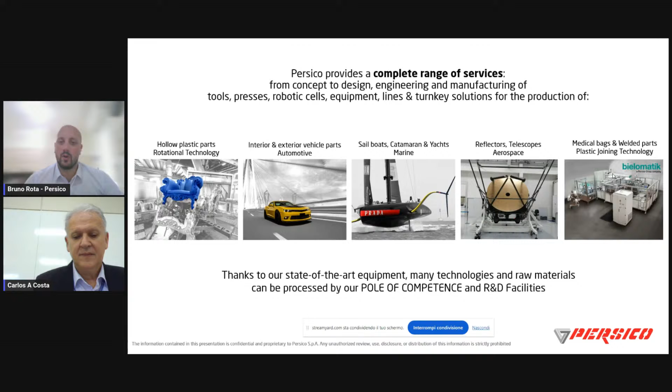So, like plastic bags for blood and so on. We have sites all over the world.

The headquarters and main site is in Italy, in Nembro, where I worked, but we have sites in North America, Mexico, China, and other parts, mainly for automotive and marine.

Last year we bought a tool maker in the USA because it's a very great market for us, and we want to increase our presence there. We want to have people there, but of course now we are training, and we want this site to reach our standard in quality, in type of work, and so on. So now we also have this rotomolding site in the USA.

So now let's focus more on the rotomolding world, what we do at Persico. Rotomolding is a really nice technology that can provide a lot of solutions for a wide range of applications.

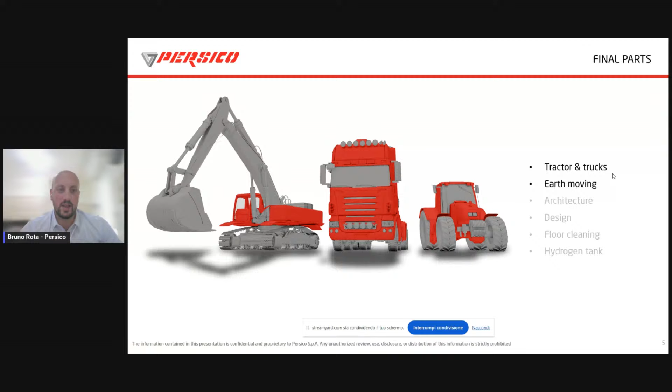Talking about the final parts you can obtain with rotomolding, you can really span very large fields of application, starting from tractors and trucks and earth moving machines, where we can make tanks, roofs, interiors, all with rotomolding, mud guards, and so on. So a lot of parts for this type of vehicle can be achieved with rotomolding technology.

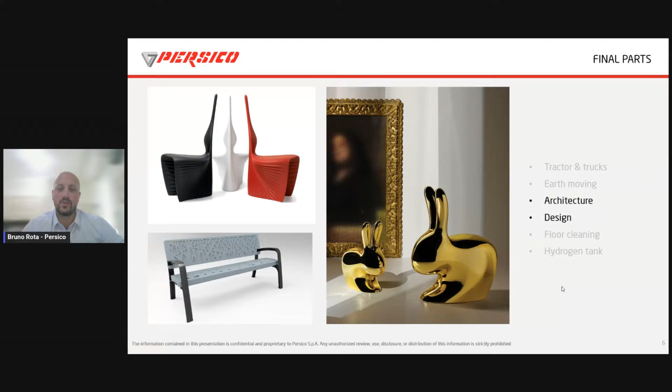We also work a lot with designers and architects to provide the best solutions for final parts. Here are some examples. This type of market is very huge, and every day there are new design parts that can be studied together. Designers come to Persico, and we study the solution together from the very beginning to the end of the project to obtain this kind of product.

And then again, with rotomolding, you can achieve very hard technical parts, like floor cleaning machines, which are very complex to obtain, with a lot of parts and a lot of cores. Not easy to obtain with other technology, but with rotomolding too, you need a lot of knowledge to achieve this kind of part.

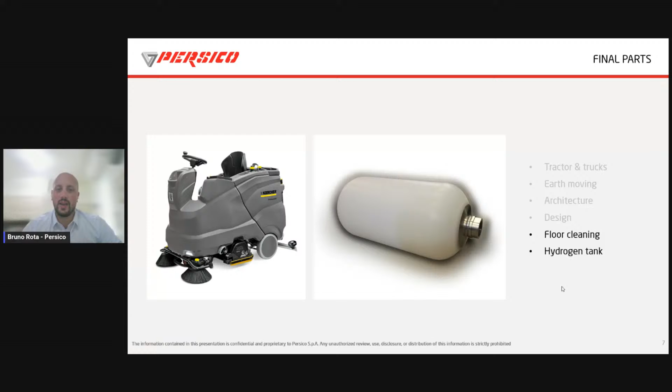But also hydrogen tanks, which seem easy but require great care and precision to obtain, because they have to resist very high pressure, so everything needs to be perfect to produce this kind of product. Again, with these types of products, we can assist the customer from the very beginning of development through to the final part.

Here's just a quick introduction on how rotomolding works. I think most of you already know it, but to briefly explain: you have a tool made of 2 or more parts. You put plastic powder inside, then put it in an oven and start to rotate. The plastic melts and covers all the surface of the tool.

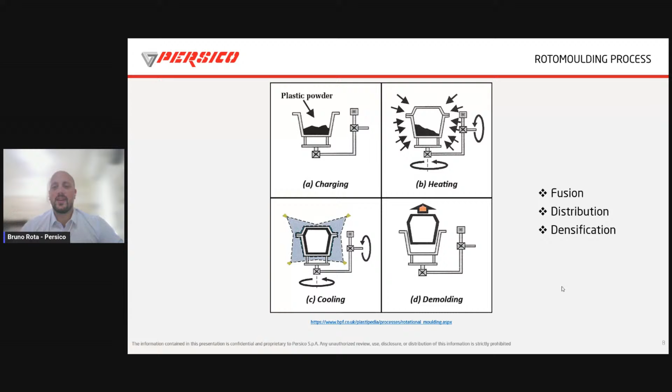When it's completely distributed on the internal surfaces of the tool, you extract it from the oven, start the cooling while still rotating on the 2 axes, and then when it's cold, you open the tool and demold the part. This way, you achieve a complete hollow plastic part without any welding, without any stress inside, making it a nice technology for this kind of product.

Here's a brief overview of what we at Persico do for the rotomolding market. As I said, we start from the very beginning. If a customer comes to us with an idea, we start with the design and co-design of a part to make it suitable for rotomolding. Then when we achieve a part that's okay for rotomolding and okay for the customer's purposes, we start with the design of the tool.

Of course, we share our ideas with the customer to make sure everything is okay, and we produce the tool. That could be a steel tool, cast aluminum, or aluminum CNC tool.

We can also make prototyping for customers. We have a pole of competence, an oven, and a smart machine, so we can try the tool in house before delivering it to the customer. We also make electric machines for rotomolding that can be combined with automation. Later we will see this better in detail.

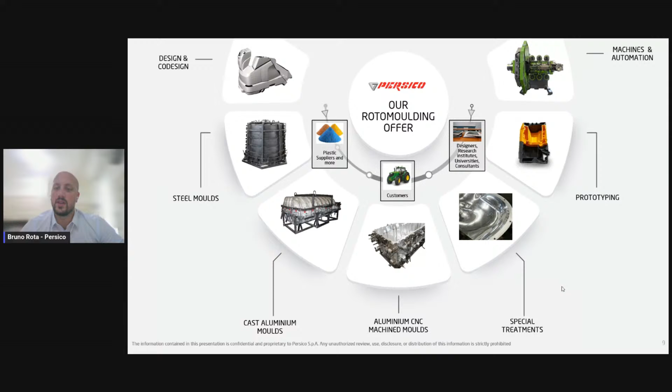And of course, we don't work only with rotomolders, but also with designers, final customers, and plastic suppliers for research and development. Here are some examples of tools we can provide, starting from steel tools that are suitable for a very big product without a lot of detail.

Because it's cheap, it's not the best quality in CNC, but for a certain type of product it's the right technology. Increasing the quality of the final part and the tool, we can work and provide cast tools: aluminium with a casting process. We create the shell of aluminium, and then we work to make it suitable for rotomolding. The most precise and higher quality tool is the CNC tool.

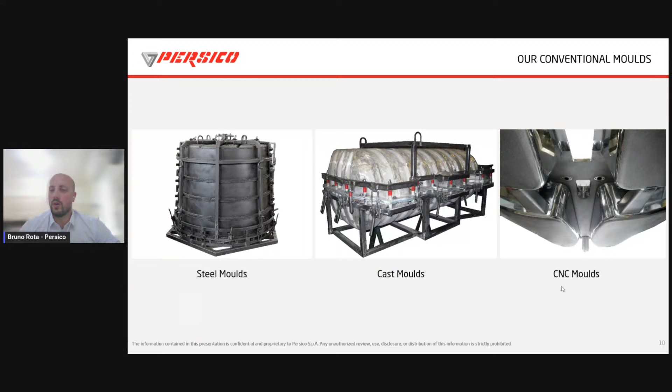Starting from billets of aluminium, we CNC the shape we want to obtain, and then we work with finishing, framing, and so on. On the surface of the tool, we can obtain very different types of effects, starting from the most common, so industrial smooth, shot peen, as CNC, but for certain types of products, design products or others, we can obtain different types of effects.

Here are some examples, like the wood effect, the mirror finish. We can work the surface with laser to obtain the texture that the customer wants, and we can collaborate together with the customer to study, and in the end obtain the result the customer has in mind.

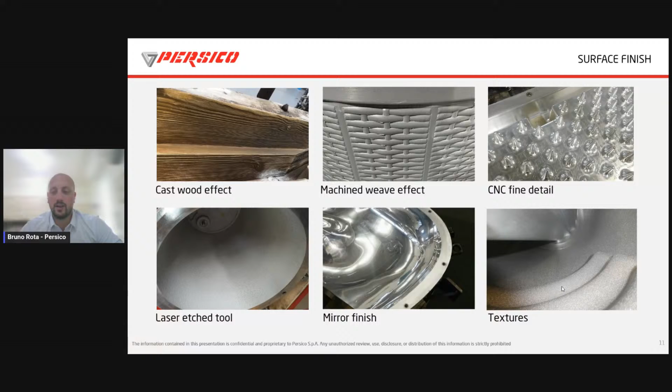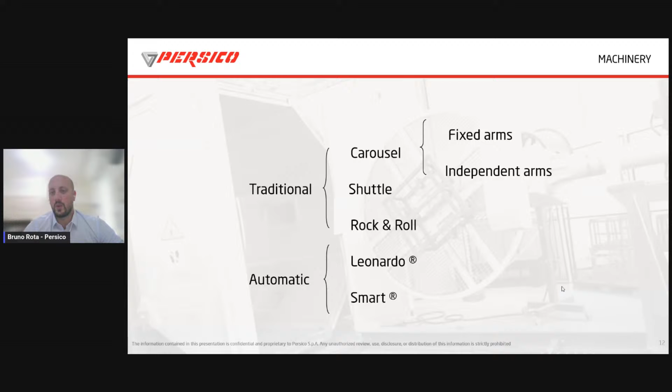As Persico, in this type of rotomolding, we provide only the molds. Then there is automatic rotomolding, where we can provide the Leonardo machine and the smart machine. In this case there is no standard oven as in the traditional one, but there is the Leonardo machine that works with hot oil, and the smart machine that works with electricity, and we can now see this better in detail.

We started at the beginning of the century with the first Leonardo machine, completely oil heated, because we wanted to introduce something new in the rotomolding world, something that could give the customer more solutions and benefits in terms of time and material. So we started studying the Leonardo machine with hot oil, and then developed our technology through the years.

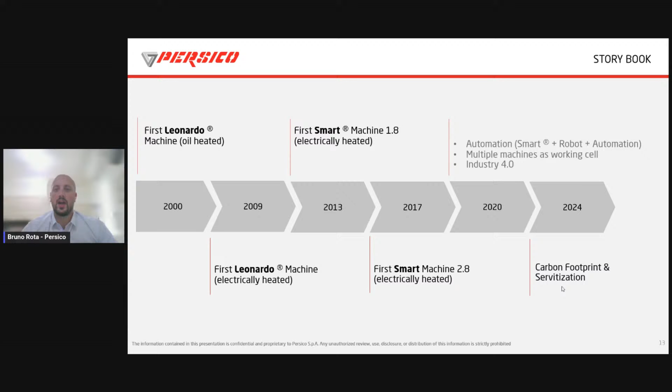Initially, again with the Leonardo machine, but heated electrically, and then we started also with the smart machine, completely electrically heated. With this kind of machine, since you don't have the oven and hot temperature, it's easier to introduce automation, partial or full automation of the process. So together with the smart machine, we can introduce robots and all the automatic systems that can make 100% of a work automated.

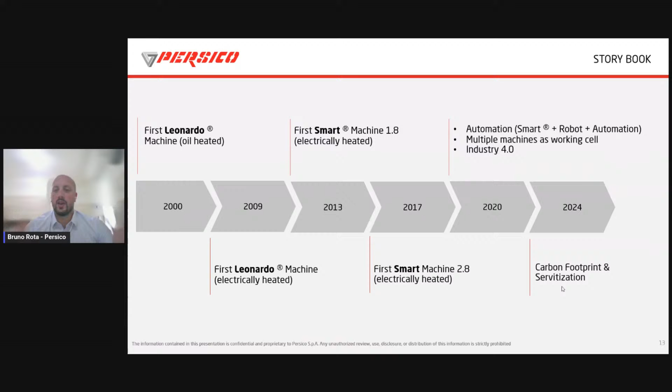Also the cooling is faster, because instead of only air or water, you can use cold oil again in these pipes, in direct contact with the tool, so you can speed up the cooling. By controlling the flow of the oil, you can better control the process, the heating and cooling of all the area of the tool. And again, in this case, you can implement automation on the machine, on the tool.

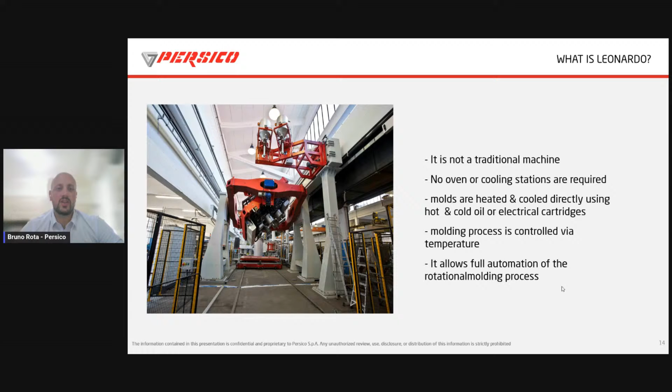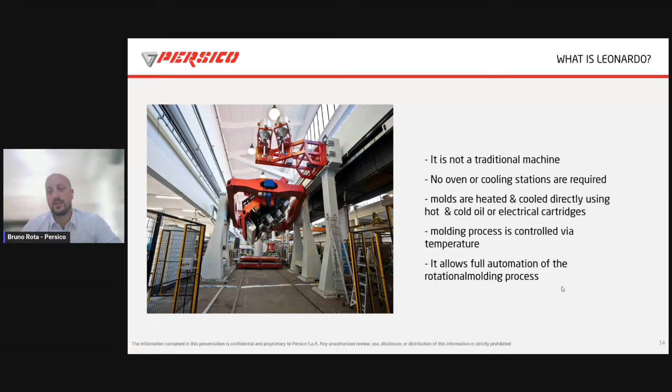In the photo, you also see the filling of the powder on top. So when the cycle is completed, the machine can open on itself, extract the part, fill the powder, close, and restart another cycle. So here you can see a video, done in collaboration with our customer, that shows their approach to rotomolding.

We worked a lot with them, and they started from the very beginning with traditional rotomolding. Then together with us we studied some solutions for them with the Leonardo machine, and then with the smart machine. So let's see this video that explains the technology better.

My name is Gunther Laube. I am production engineer here at Kärcher in Winnenden, responsible for the plastic production for the professional plants in Germany.

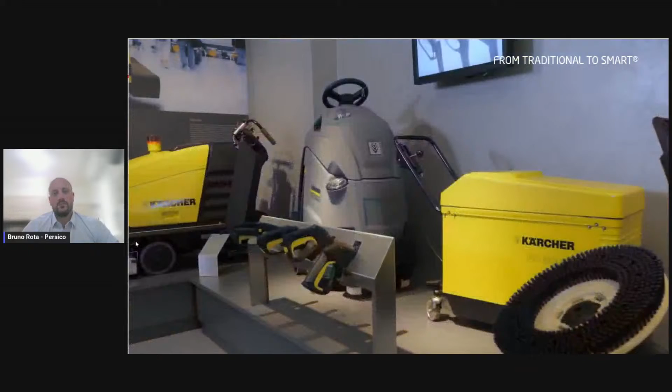We started rotomolding in 2004, and we bought a traditional machine with 4 independent arms and used cast molds for the first rotomolding parts.

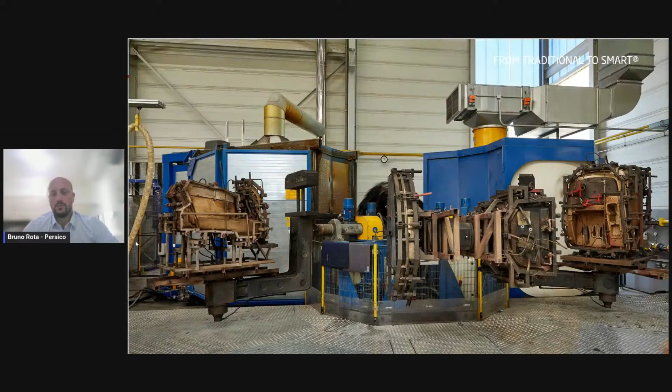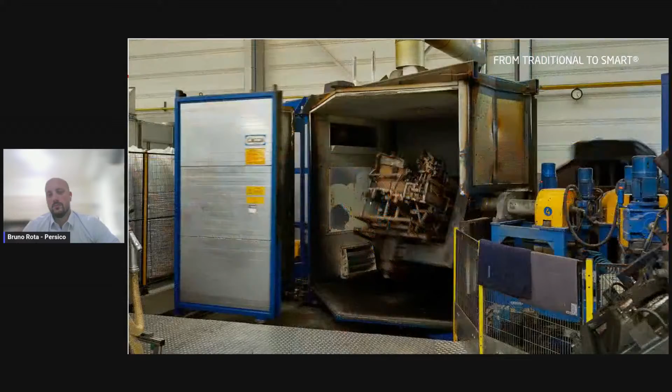Persico was and is one of the leading mold makers in Italy. We found good prices, good support, and also good quality, comparable with our customers here in Germany. We found the rotomolded parts out of the CNC milled mold were more precise in shape and followed the 3D shape of the part better. Also, the flanges were fitting better together, so we had less afterworking and a better quality of the products.

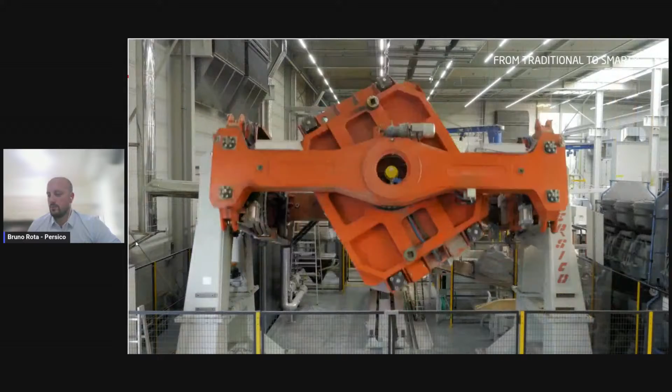We had a project with a tank of higher amounts, and so we found the Leonardo technology very interesting because of the automation of the whole process. We found production costs were lower because we need no person to operate the mold and demold the parts.

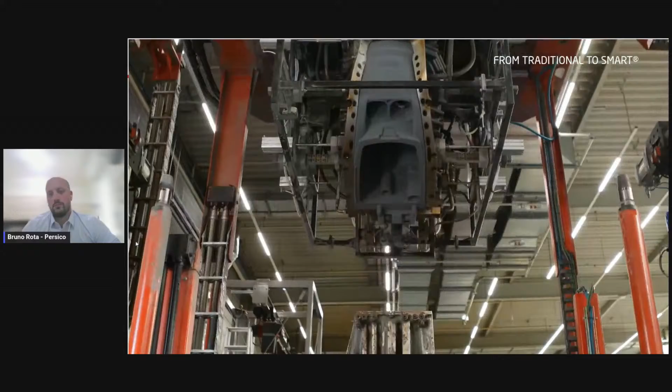We saved up to 25% of energy and of course also of material, because we were able to adjust the wall thickness better.

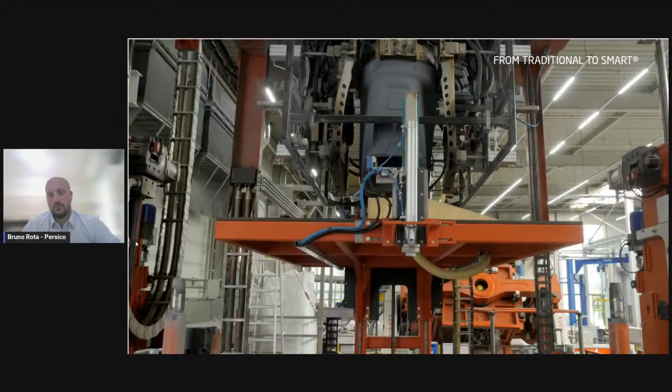Not all of our parts are possible to produce with the Leonardo technology. If they have inserts, we had to stop the automatic cycle, which is not good. Also, the dimension is sometimes a problem. With the smart machine, we can do these things.

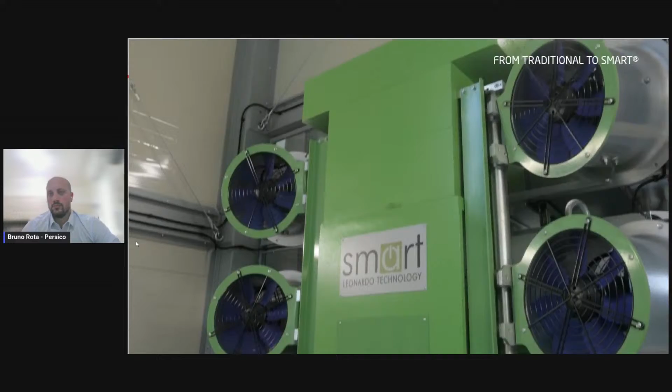In our opinion, the smart machine is the most energy efficient way to produce the parts. It is easy to adjust the wall thickness by choosing the power of the electric heaters, even in critical areas, so we get enough wall thickness there.

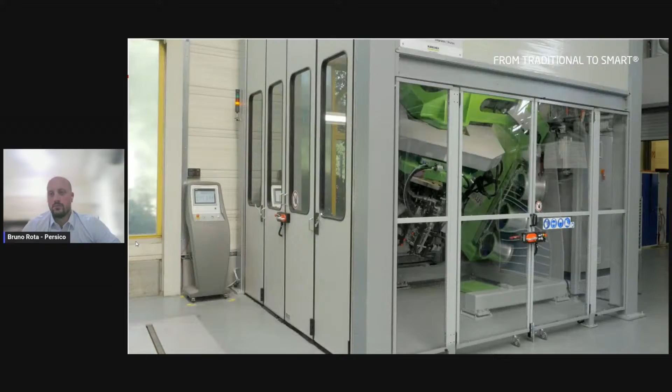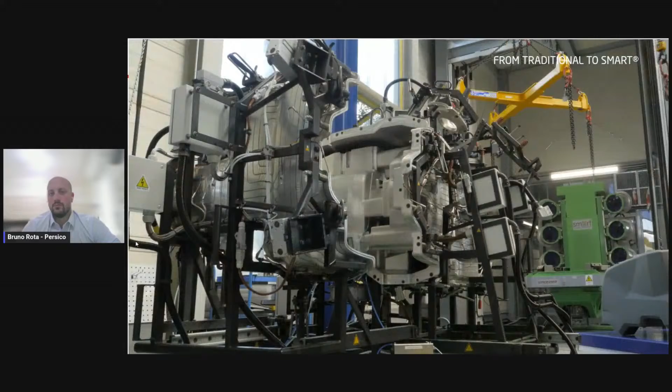It is easier to create parts with deep holes or long tubes, where you always have a problem with the traditional machines. With the smart machine, you only have to adjust the heating power and you have enough wall thickness. We are at the startup phase now, and we're only able to produce some parts.

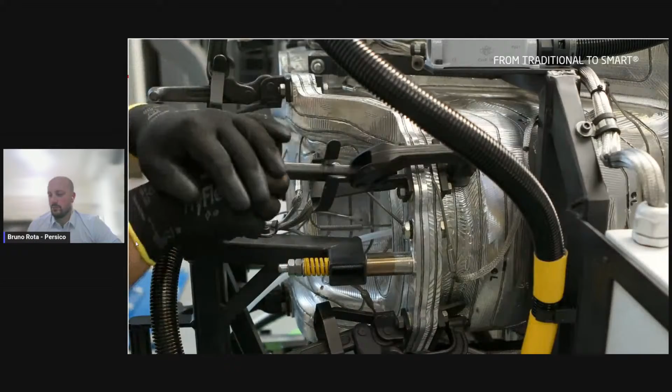Up to now, we have reduced 10% of weight at the part, which is good. And we found that the shape of the part is very good, very precise, because of the internal air we use at the cooling process.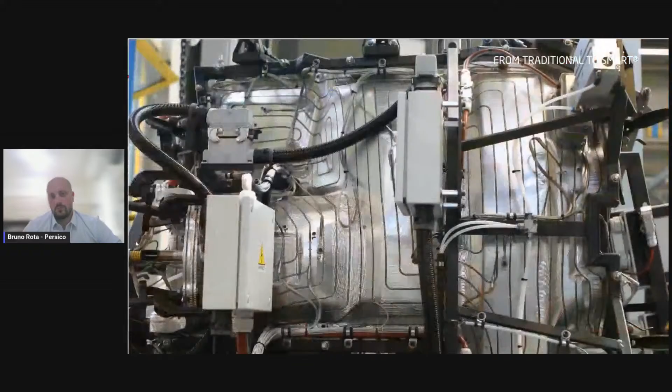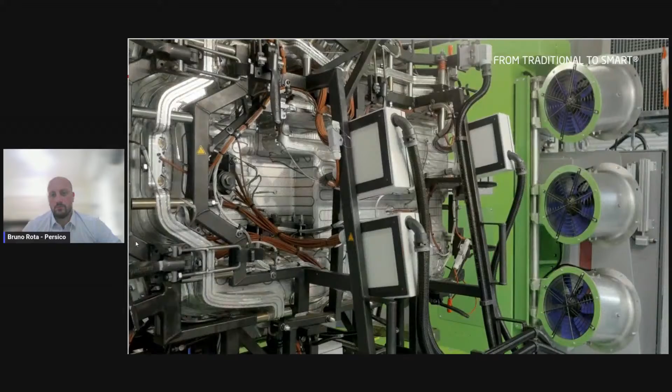Our molds have never been easy because we use very complex parts, so the mold needs to have many inserts and loose parts. So it was always important to discuss the project and find a good solution that was working at the end to have success.

With the Leonardo technology, we were able to produce our tanks with the highest amounts with less production costs. With the smart technology, it's easier to rotomold parts out of other materials than polyethylene. I think every time we put out of the rotomolding technology all that we can, we have new possibilities for the future.

As the video explained, our solution with Leonardo and Smart Machine is done in order to give some advantages to the customer: the possibility to make more complex geometry, the possibility to save time, energy, material, and the possibility to use different types of material.

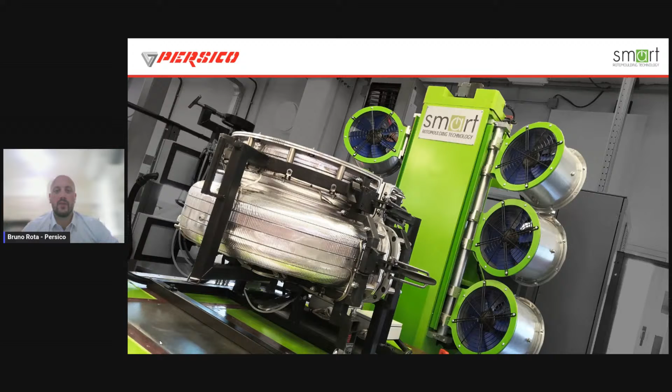In the video, our smart technology was already introduced, and this is a tool that works on the smart machine in order to provide heat to a tool. Again, we don't have an oven, but as you can see on the external surface of the tool here, there are a lot of electric heaters that are controlled by the machine in order to give the right amount of energy and heating to the tool.

Thanks to this technology, our customers can have a lot of advantages, saving some energy, because all the energy that is provided to the electric heaters is then converted into heat and transferred to the internal side of the tool. So there is no heat leakage like happens in an oven.

There is not the operation that is common in traditional rotomolding, when you open the oven and you waste a lot of heat - we may have a small tool in a big oven. Here all the energy is concentrated on the tool.

You can reduce the amount of material because you can manage the heating in different areas of the molds. In more critical areas, you can increase the thickness, and not in all the part. You can reduce the material in scrap areas, and so you can optimize the total weight of powder that you use for any cycle.

Because you can always use the same set of parameters, you will always obtain the same type of product. So there is process repeatability to obtain always the same product, controlling the heating and the cooling with all the probes that are inside the tool and connected to the machine.

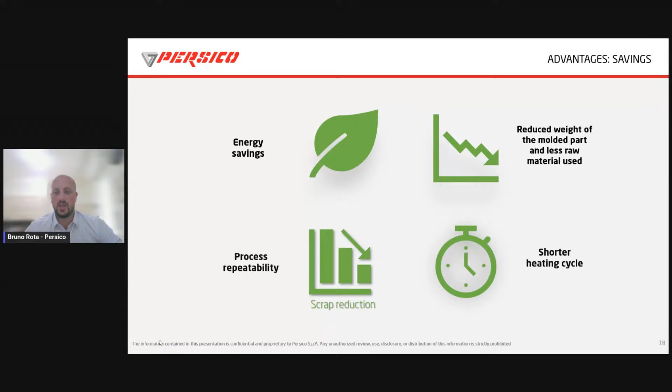You can achieve a shorter cycle. Of course, again, having electric heaters all around the mold, you can create a uniform thickness and manage the thickness in different areas.

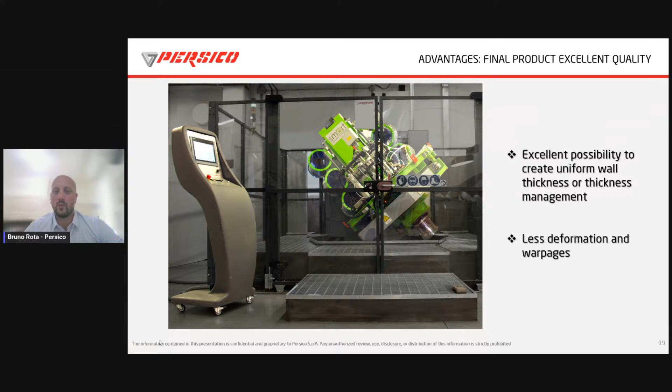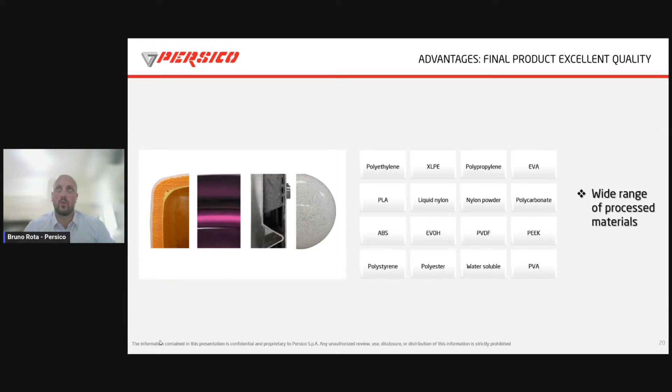So no problem of long cores, parts that are difficult to heat, as in standard rotomolding. And you can also manage the deformation and warpage, again controlling the temperature and the pressure inside the tool. Thanks to all the control that you can put on the process with Smart Machine, you can use more types of material easily with respect to standard rotomolding technology with an oven.

Here in this type of machine, we can control up to 48 different zones. So if you have a lot of critical parts where you need to increase the heat, with this kind of machine you can. On a tool you have a lot of different zones divided based on the heat that you want to give the product in all the areas, and you can control all of them with the power that you provide to the electrical heaters, and you can measure the temperature in each area in real time.

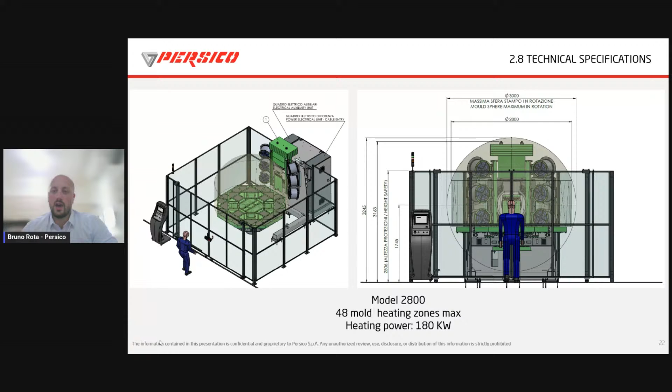As you can see, it's also an advantage in terms of dimension, because it's quite smaller if you think of a standard rotomolding oven. So it's very small.

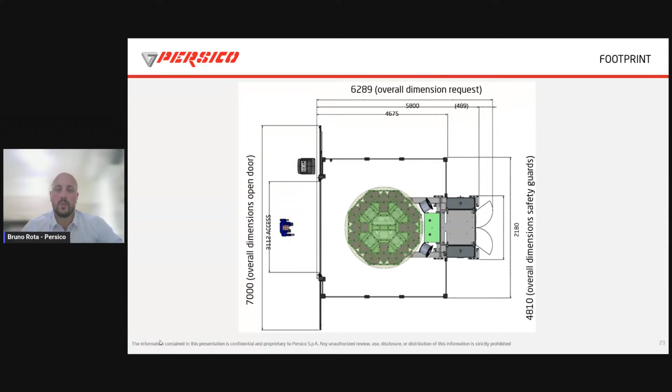Then here is a quick overview from the top of the machine with the operator.

With this kind of machine, what we want to give the customer is the possibility to innovate in the design of the parts in order to have more complex geometry. And of course, another very good point of this kind of machine is safety. We provide all the safety tools together with the machine so that the operator can work 100% in a safe environment.

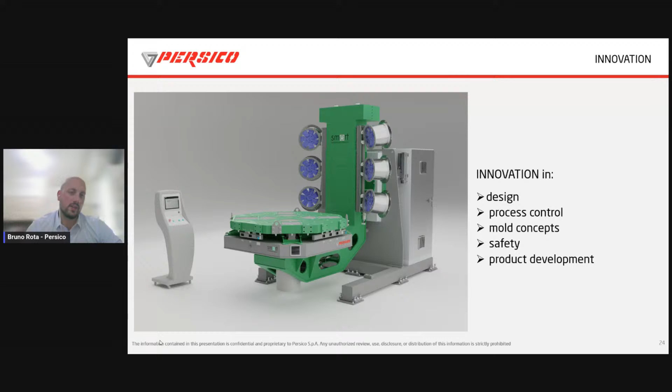Of course, you cannot only control the temperature, but there are also a lot of systems that can improve the quality of the part. You can generate vacuum inside the tool. There are gaskets on the flanges of the tool. You can put nitrogen inside the tool to extract oxygen and avoid oxidation of the part. You can pressurize the internal part of the tool, again to better control the deformation and warpage. And of course, you can pump air inside the tool for internal cooling as well.

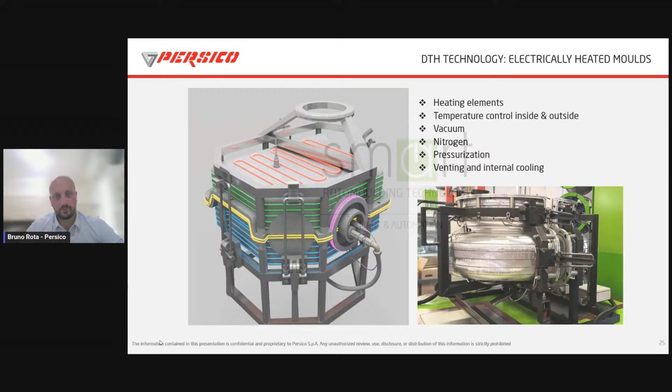As I said at the beginning, this type of technology is suitable also for introducing automation, because here you don't have to deal with hot temperatures outside of the tool. So we developed a lot of systems to help the customer automate the process.

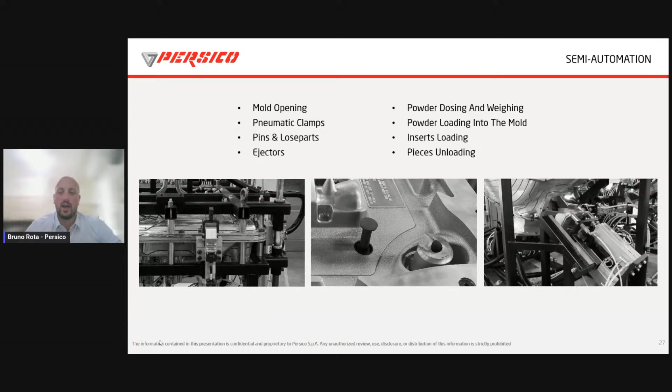But here it is still a semi-automation, because the work of one operator is still needed to take the parts out of the tool and so on. But of course, what we can also provide is 100% automation. So in combination with a robot, we can study together with the customer a fully automatic line.

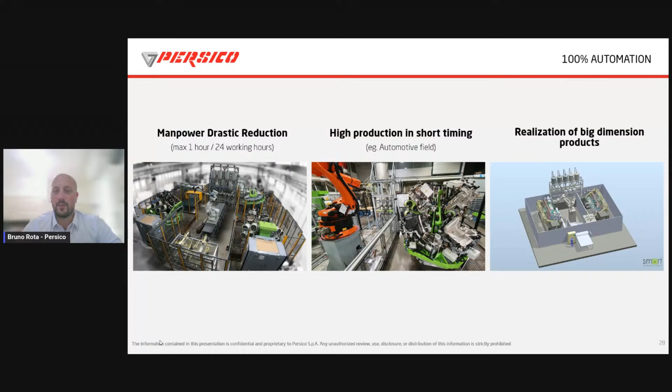In these cases, there is a robot, the smart machine with all of the automatic systems, a system for weighing the powder, and again the robot that fills the powder inside the tool. And of course, when the cycle is finished, the robot can take the part from the mold and put it out of the line. So in this case, 100% of the work related to the process is automatic. And we can see in this quick video some examples of lines that we made.

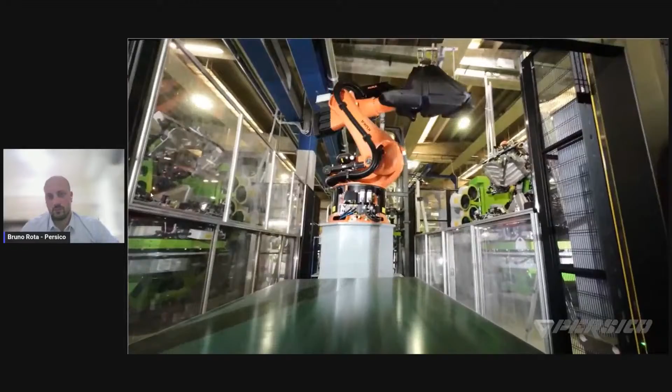So thanks to all these advantages that the smart machine, smart technology, and automation can give to the customer, what we want to do is give more solutions to the customer, and we think that the future is today, so we want to help our customer to be now in the future with all these kinds of advantages. We think that the collaboration between all these automatic lines, robots, and human thinking, human work, can be and is the solution for rotational molding.

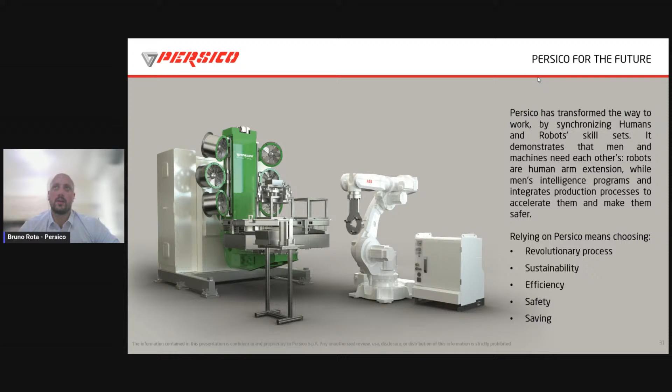For different types of aspects, not only for a better process, but also in terms of sustainability, energy efficiency, and safety. So this is our technology, our proposal, and I want to thank you for the attention and for giving me this opportunity to show you this presentation.

Hi, thank you very much, Bruno. It's a really nice presentation. We have the chance to visit Persico in Nembro, Bergamo, and it is amazing what they do there in terms of tools, machines and innovation. It's really nice to hear about this.